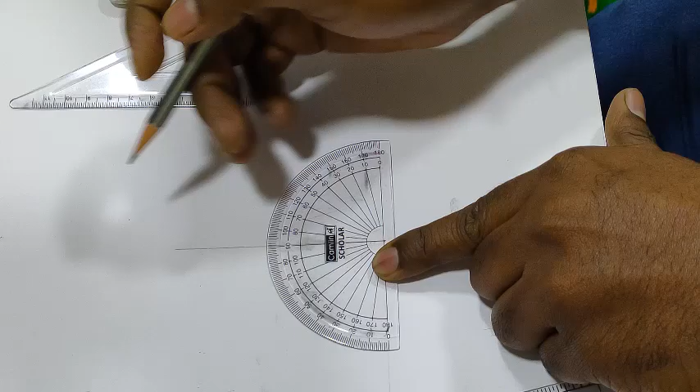After that we have to take protractor. With help of protractor, just mention origin and place protractor exactly, this bottom line exactly parallel to the horizontal line, this 90 degrees line exactly parallel to the vertical line. Okay, then you have to measure 30 degrees in left hand side, 30 degrees in right hand side.

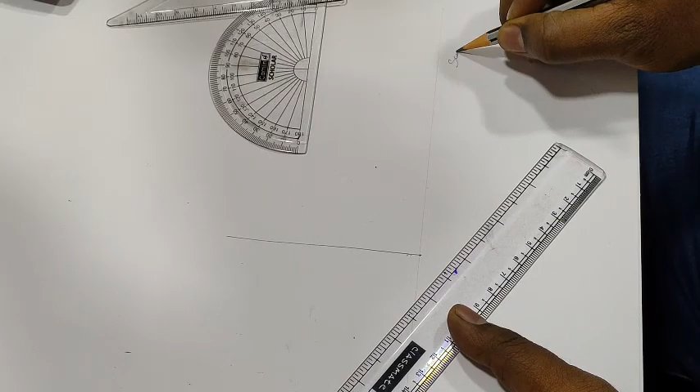While drawing this diagram, we have to maintain the scale 1:2. 1:2 means in actual practicing, we have to take the length of the wood is 150 centimeters. Now we are maintaining the scale 1:2, which means while drawing this diagram, we have to maintain half of these dimensions. How much? 75. Okay, 75 centimeter only. Sorry, 15 centimeters or 7.5 centimeters.

The actual size of the wood piece is 15 centimeters. We have to reduce the scale to 1:2. 1:2 means 7.5 centimeters. Okay. Based upon this, all the dimensions will maintain the scale 1:2.

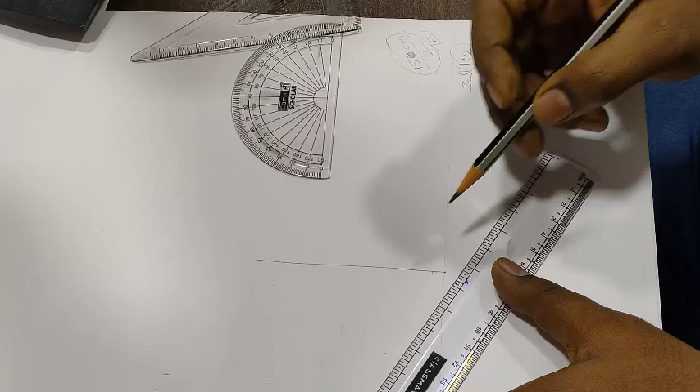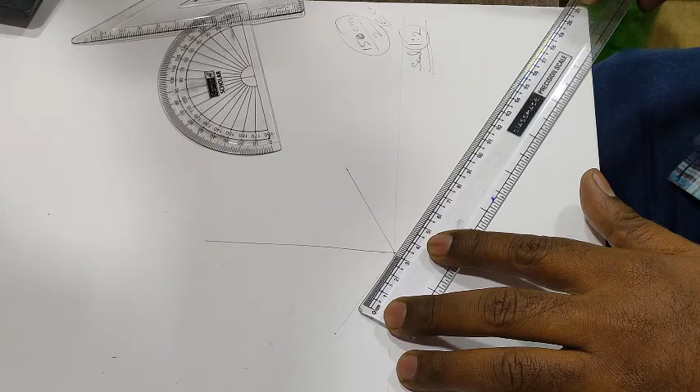Okay, now join this 30 degrees line and horizontal line. Similarly, join this 30 degrees line and horizontal line. Now, what is the side of this object? One side is 1.5. Actually 3 centimeters, but we have to maintain scale 1:2 now. That's why 1.5 centimeter.

This side is actually 5 centimeters, but you are maintaining scale 1:2 now. That's why 2.5. Now, what is the height? Actual height is 15 centimeters, but you are maintaining the 1:2. 1:2 means 7.5. This is 7.5. Okay.

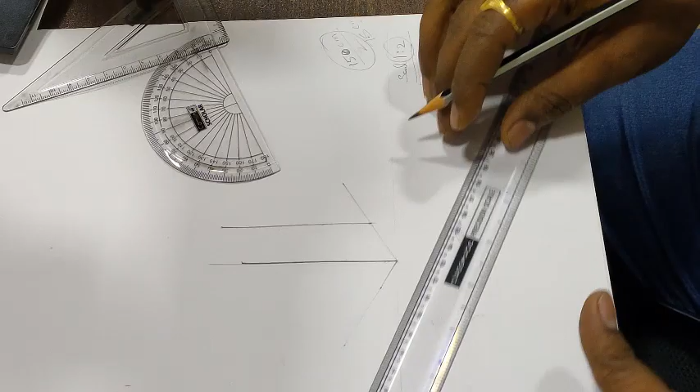Next, take scale parallel to this one, move in this direction. Again, we have to draw one vertical line with a length of 7.5 up to here. Okay. Next, in T-lap joint, this is the bottom one. Actually, like this T-lap joint. Now I am drawing this one up to 5 centimeters. We have to draw straight line. 1, 2, 3, 4, 5.

After that, we have to draw one line here. That line is exactly parallel to this line. Just take scale parallel to this one and move in this direction. How much we have to draw parallel line? 0.75. Again we have to extend this point. We have to draw one vertical line passing this point exactly parallel to this line. How much distance we have to draw? 2.5. 1, 2, 2.5.

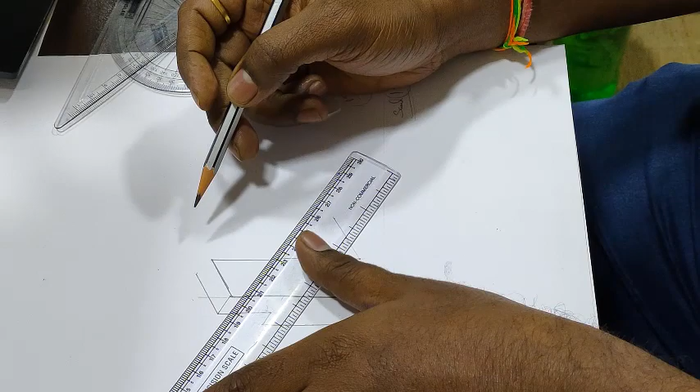Now take scale parallel to this one and move in this direction. Okay. Again take scale parallel to this one and move in this direction. Join these 2 points. Now scale parallel to this one and move in this direction. Draw one line. How much distance? 2.5. Take scale parallel to this one, move in this direction. Join these 2 points. Again take scale parallel to this one and move in this direction. Join this one and this one. This is the final figure.

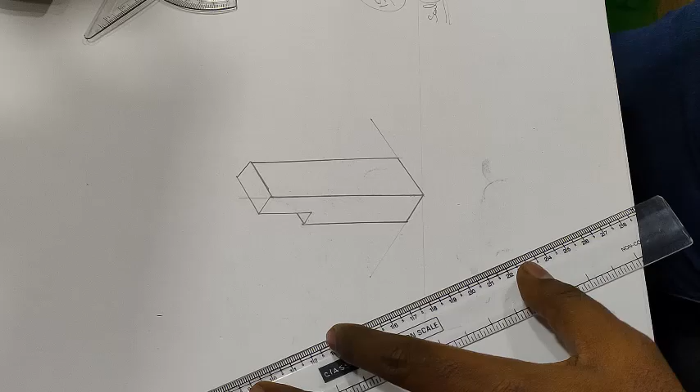Now we have to highlight the external lines. What are the lines we have to draw now? Just highlight those lines. This is the bottom part. Now we have to provide dimension to the corresponding diagram. For that purpose, we have to extend this line very lightly and extend this line also. Take scale parallel to this one and move in this direction. Draw one parallel line.

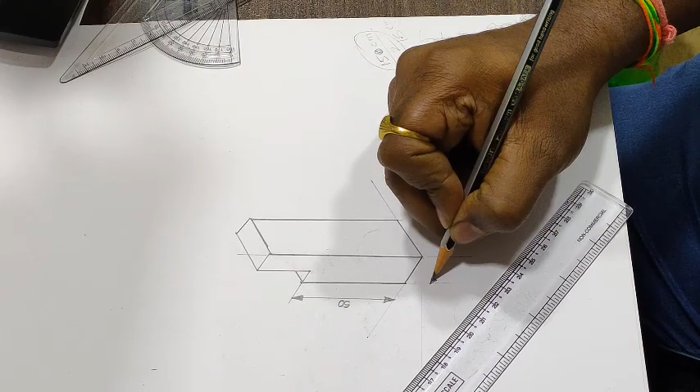Now this is the dimensioning line. How much is the length here? 50 mm. Okay, next this one. Take scale parallel to this one and move in this direction. How much this one? 25, not 25, 15. Always the dimension line will maintain some distance from the actual diagram and the dimension will be given at the top of the line.

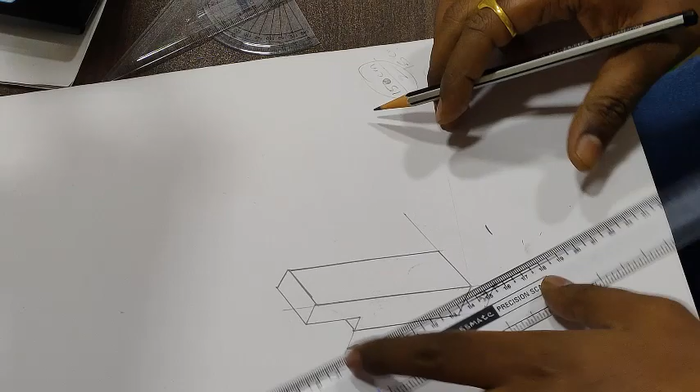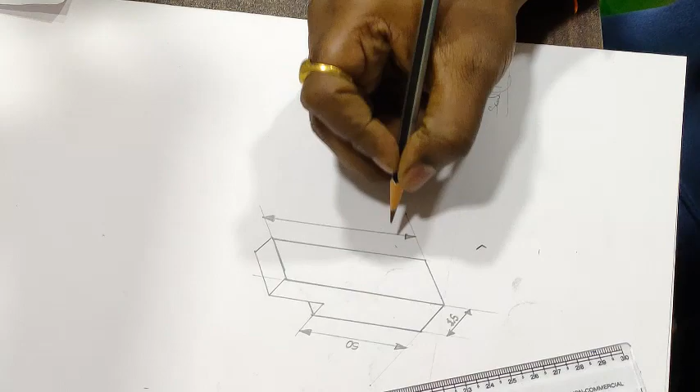Next this one. Take scale parallel to this one and move in this direction and draw one parallel line and provide proper arrow marks. All arrow marks will be the same dimension, don't change. This is how much? 75 mm. Like this we have to provide all the corresponding dimensions related to this figure. Then only those who are doing the experiment can understand the dimensions corresponding to every one.

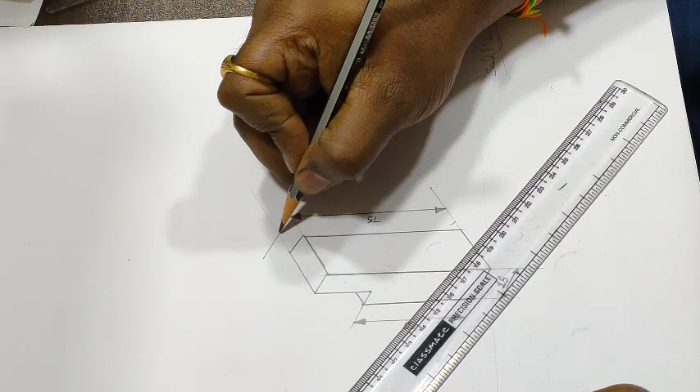Here providing dimension is somewhat difficult, very small distance. Due to that reason, in these situations how we can give dimensions I will show now. Just take scale parallel to this one and move in this direction. Draw one line here, one line here.

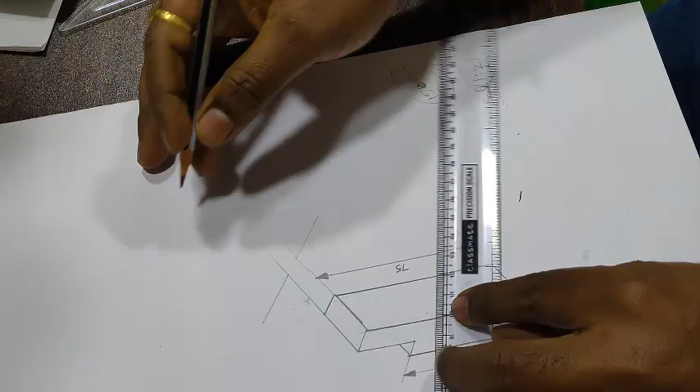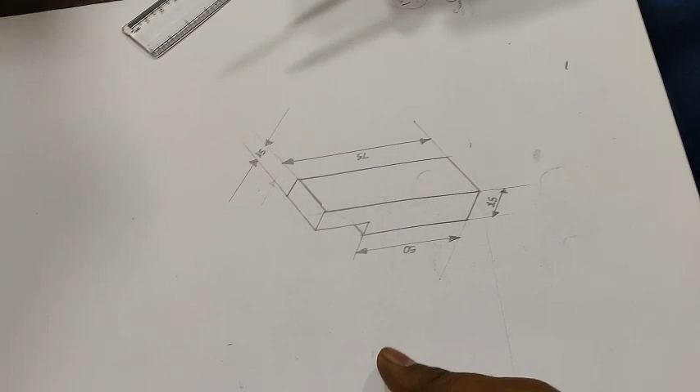How much is this one? 1.5. That means 15 mm. Okay, like this we have to provide all the dimensions corresponding to this component. Now the bottom part will be completed. Now the top part, the top T shape, we have to draw.

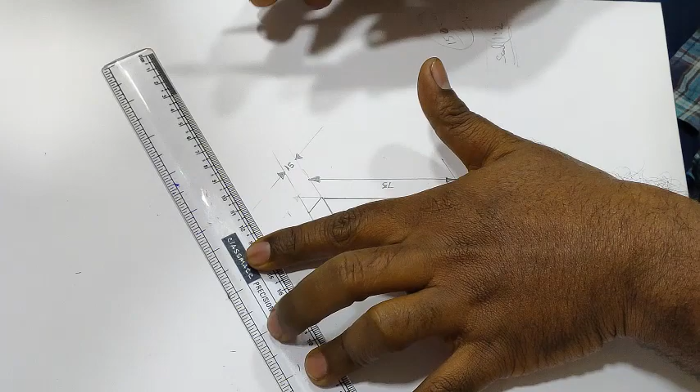Before drawing the top part, just take the scale parallel to this line and move in this direction. Just draw one inclined line here. After that we have to draw one horizontal line, exactly parallel to this bottom line. Just move in this direction, somewhere here. Just one horizontal line.

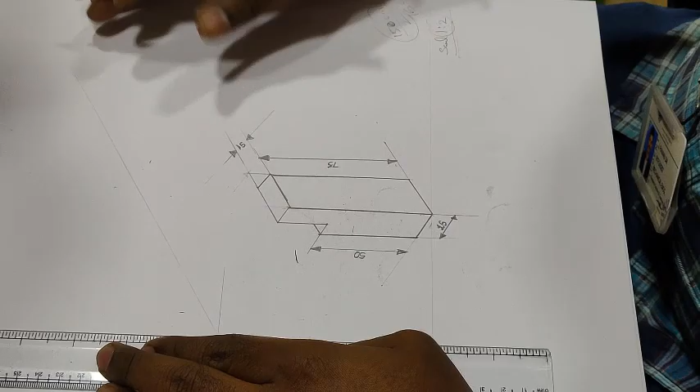Now both the lines cross together. We have to identify one origin point here. After that, take the set square, place it parallel to this horizontal line and draw one vertical line. Just extend this line up to the origin. After that take the protractor. With the help of the protractor, measure 30 degree lines on the left hand side only. Don't measure on the right side, just the left hand side.

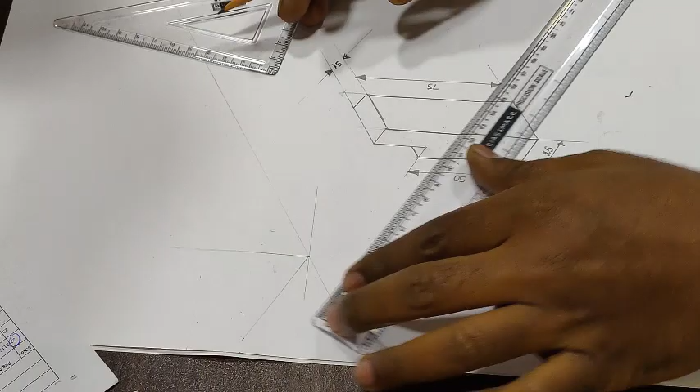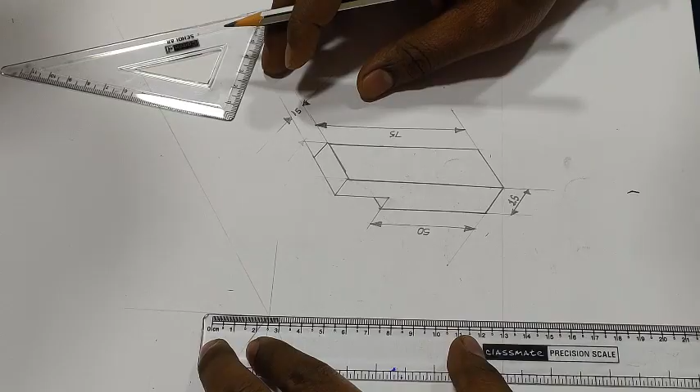Yeah, see here. Now the side of this T shape is 1.5. How much? 1.5. Actually 3, but you have to maintain the 1:2 scale, na? Height is 2.5. Height is 2.5. Okay.

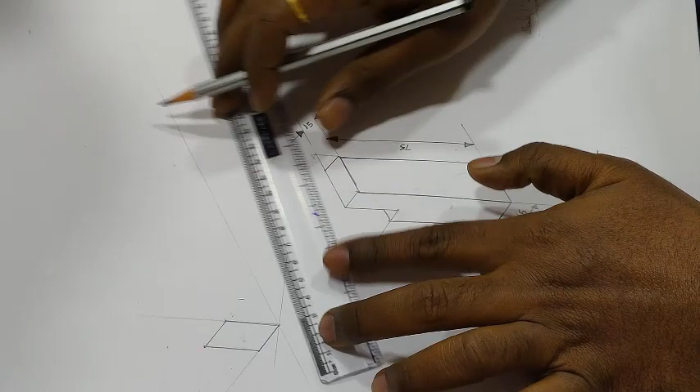Again, take the scale parallel to this one and move in this direction. Draw one vertical line passing through this point, exactly 2.5 in dimension. Now join this point parallel to this line. Take the scale parallel to that one, move in upward direction. Now we have to draw one inclination line. Already we have drawn an inclination line. How do we draw this line? Take the scale parallel to this one and move in this direction. Then draw this line.

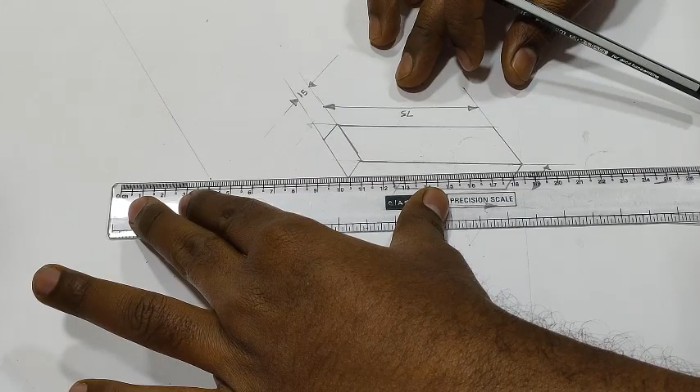Now we have to mark the 2.5 distance, point by point. Okay. On that particular horizontal line, we have to mark every 2.5 distance. This is 2.5. This is 2.5. This is 2.5. Now take the scale parallel to this line, move in this direction and draw one vertical line exactly parallel to this one. How much distance? 2.5. Okay.

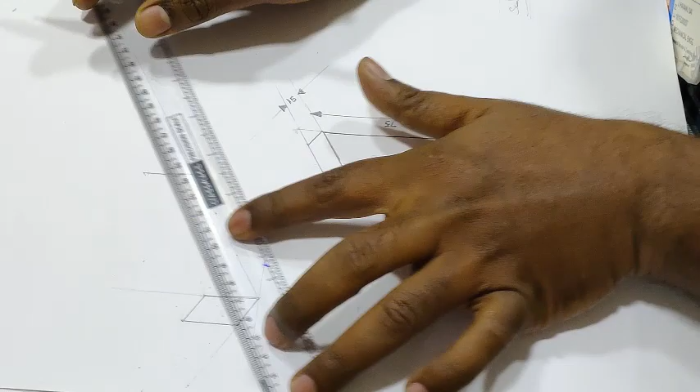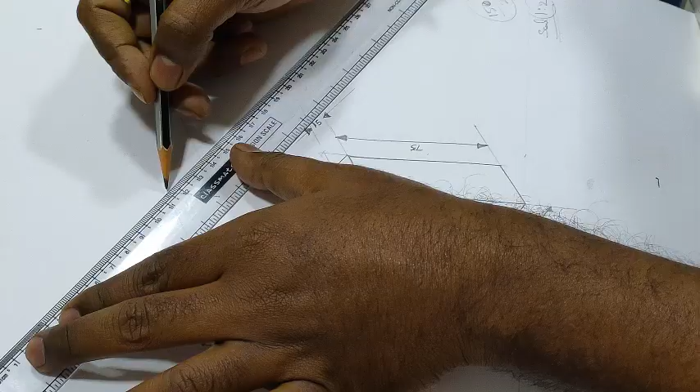Now take the scale parallel to this one, move in this direction and just join this point very lightly. Don't draw darkly, very lightly. Next, again join this point, take the scale parallel to this one, move in this direction and draw one inclination line. Don't worry about dimensions, just draw one inclination line. Next, what is the dimension of this one? 1.5. Similarly here also 1.5. We have to mark 1.5.

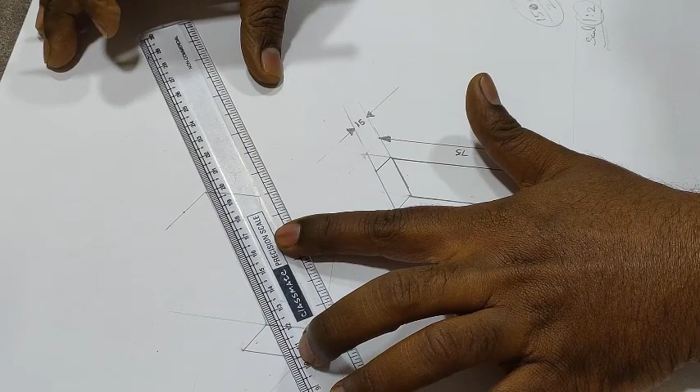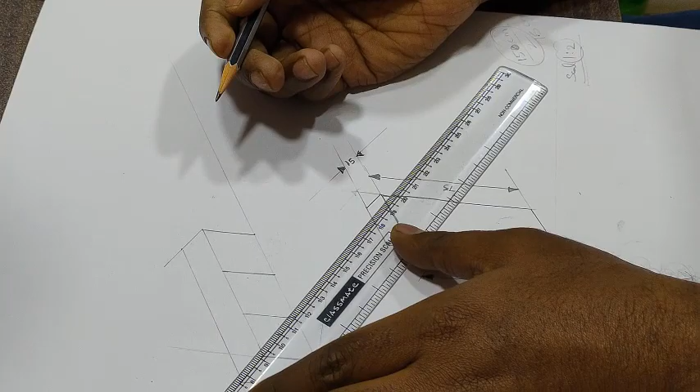Now take the scale parallel to this one, move in this direction and join this point and this point. Okay. Now take the scale parallel to this one, move in this direction. We have already marked the 2.5 line. Just extend that point here also. After that take the scale parallel to this one, move in this direction. This vertical line and this horizontal line meet together. From that origin we have to draw one inclination line, exactly parallel to this line.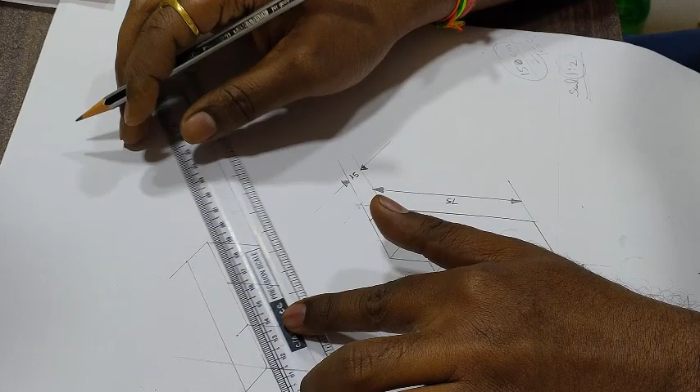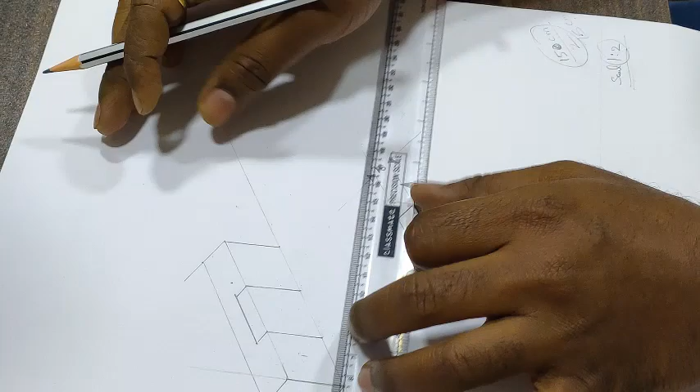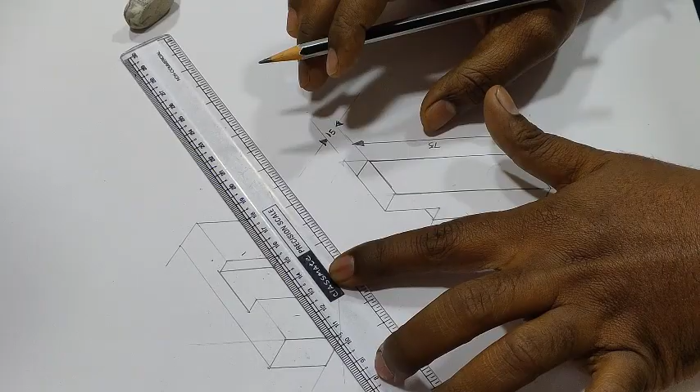How much? 0.75. 0.75. Similarly we have to draw the same length of line from this line. How much? 0.75. Join this point, parallel to this line. Okay. Now erase this line. Take the scale parallel to this one, move in this direction and draw one vertical line parallel to this line. How much? 2.5 distance. Just join this point, and take the scale parallel to this one, move in this direction and project this point up to this line.

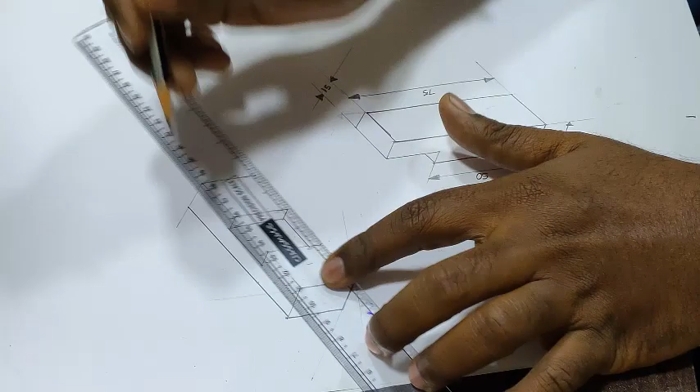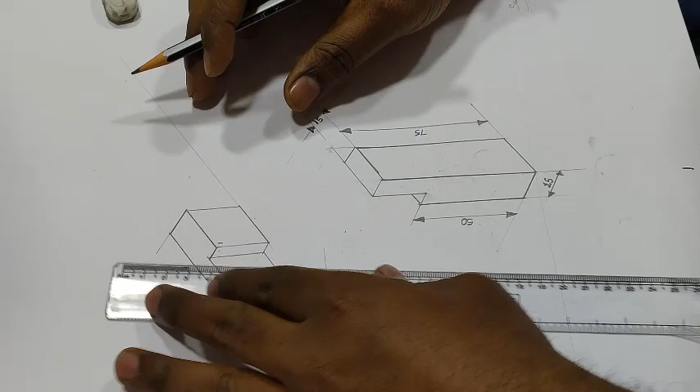Now just highlight the outsides. This is the final view of the top one. This is the bottom one, this is the top one. Again, the same way we followed for giving dimensions, we have to follow the same things here also.

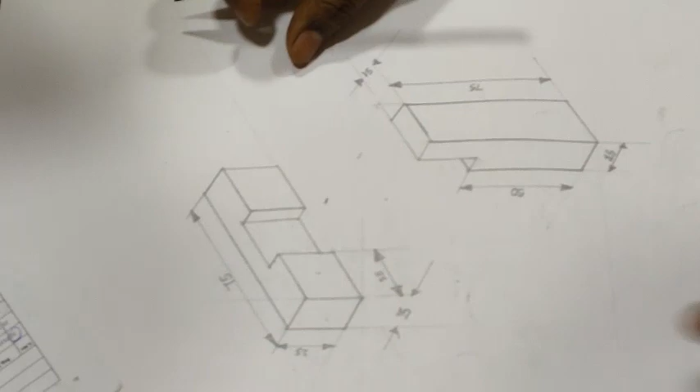Okay, thank you. Finally, we have to mention the proper dimensions to all the corresponding sides. Okay. Finally, we have to write all dimensions in mm.